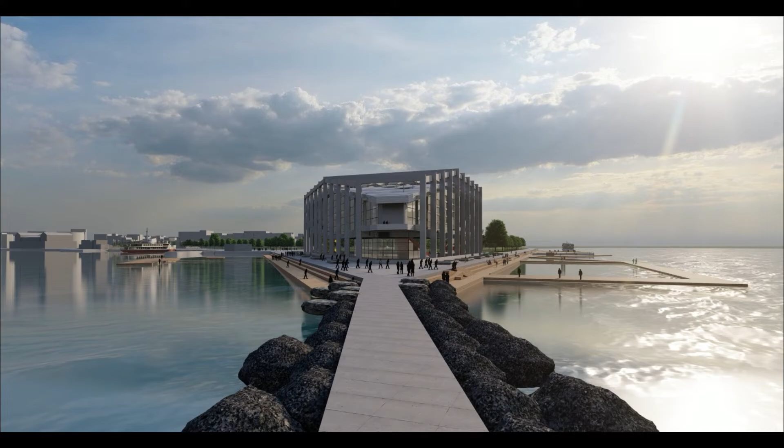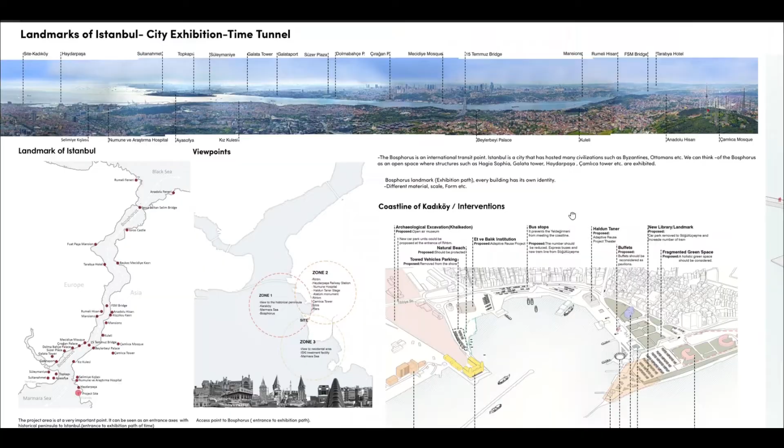Hello everyone, today I will present my 4th grade graduation project. The topic was a public library.

Let's start by explaining the location of the project. The library is located in Istanbul, Kadıköy, on the Asian side of Turkey, at the entrance point of the Bosphorus. You can see the project site here: this is the Bosphorus, this is the Black Sea, this is the Marmara Sea, and this is the historical peninsula where Sultanahmet, Hagia Sophia, and Topkapi are located. You can match this map and this perspective photo together, and follow the site and the Bosphorus together.

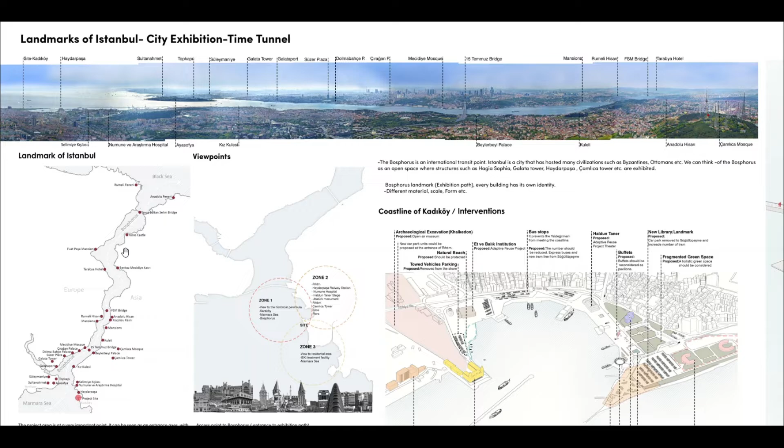The Bosphorus is an international transit point. Istanbul is a city that has hosted many civilizations such as Byzantines, Ottomans, etc. That's why we can think of the Bosphorus as an open space where structures such as Hagia Sophia, Galata Tower, Haydarpaşa, and Çamlıca Tower are exhibited.

As a first concept, Sultanahmet and Hagia Sophia are located here, at the top of the hill, so the new library will try to reach them.

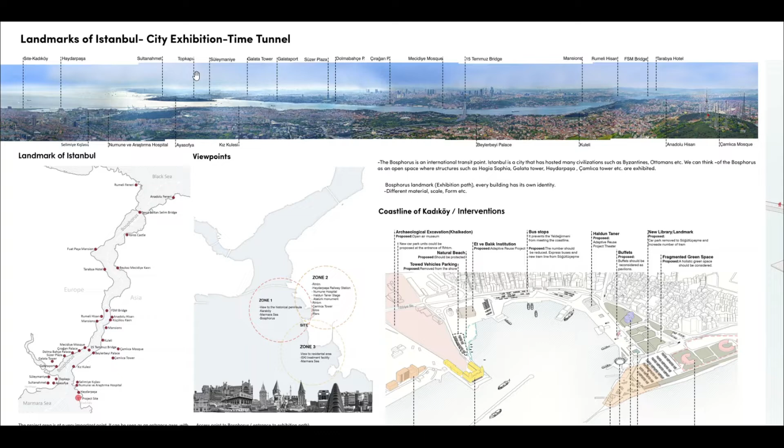Looking at a bit of analysis, we can see the viewpoints of the site. The site directly sees the historical peninsula and the Marmara Sea in that direction. I divided them into zone 1, zone 2, and zone 3, and they have different kinds of opportunities, so it's a very important point.

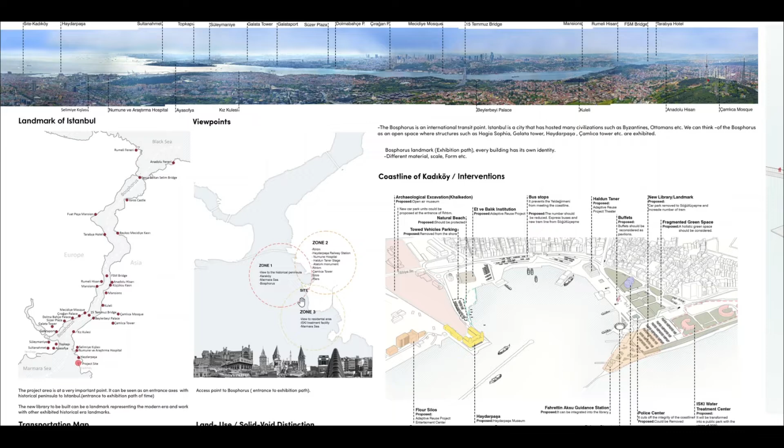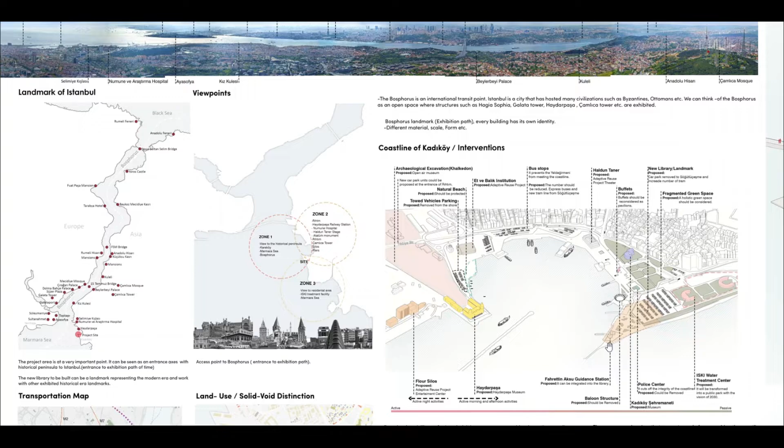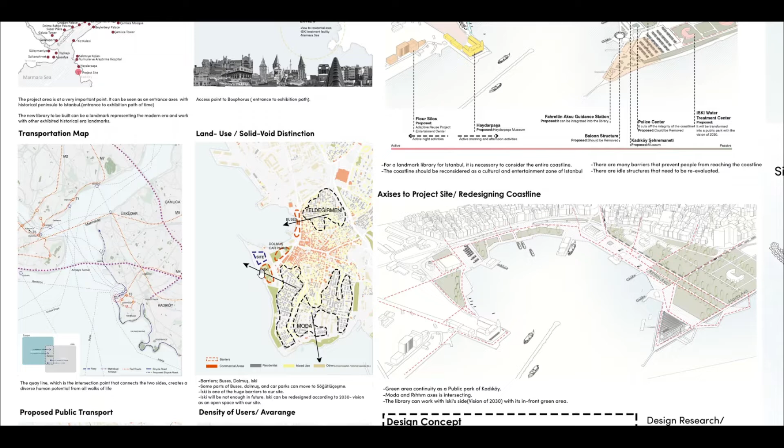Looking a bit closer, maybe you can understand this location better. This is the coast, this is the site, and this is the location of the building. Looking at the transportation map, it's very easy to reach the site from all over Istanbul. And looking quickly at land use, this is the site here, and behind the site we have commercial and residential zones.

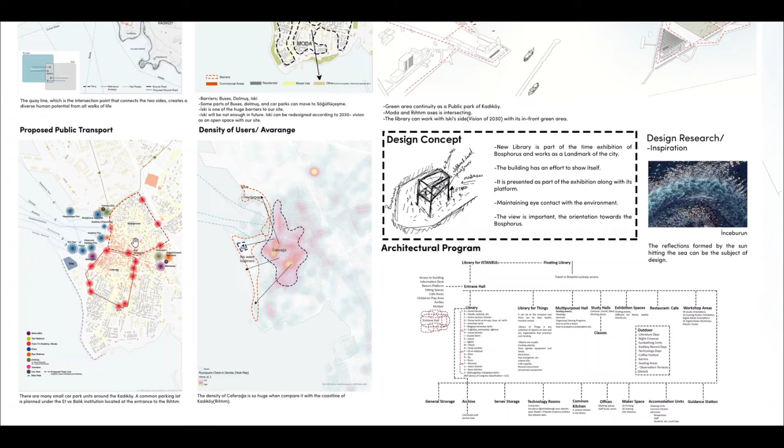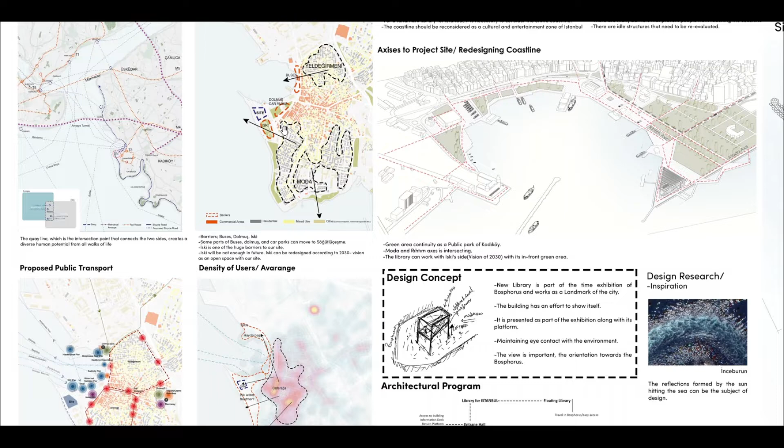You can check them in more detail in the PDF. I have some proposed public transport changes, because I remove this bus and the dolmuş car park unit, and that's why I propose a new tram road around this Yeldeğirmeni zone.

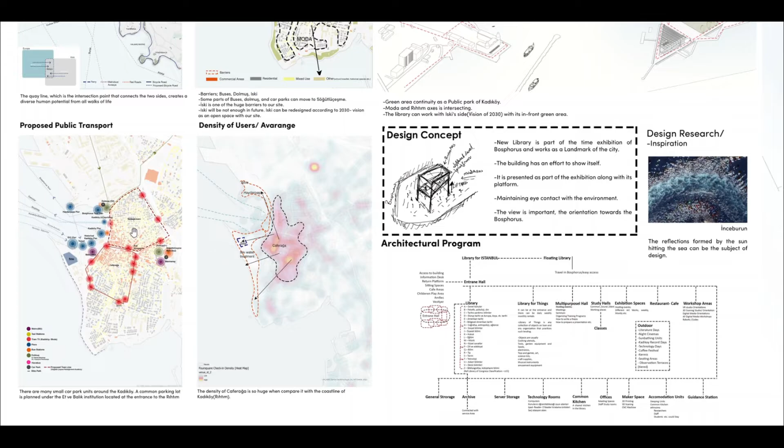This is a cove where our site is located, and this is the Kadıköy region, and this is the coastline of Kadıköy. For a landmark library for Istanbul, it's necessary to consider the entire coastline.

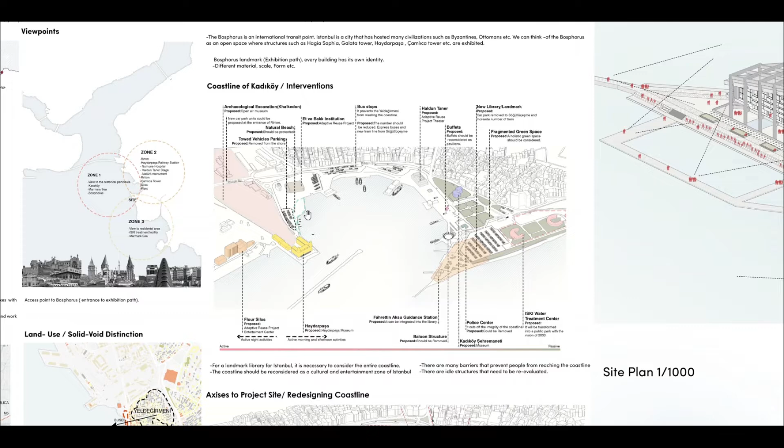The coastline should be reconsidered as a cultural and entertainment zone of Istanbul. But there are many barriers that prevent people from reaching the coastline. That's why I find a new place for the bus stops and the buffets, and I reorganize the buffets as an intervention area for the coastline. You can check it in more detail, of course.

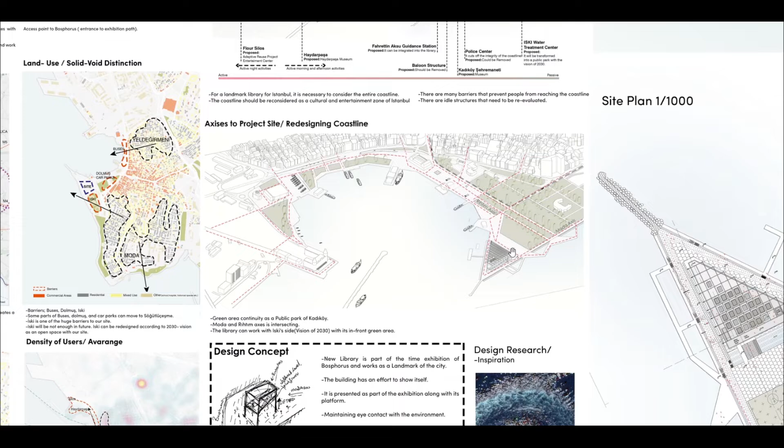This is the project site, and this is the project, the new library. You can see how we can reach the building from all the access points. To summarize the design concept, at the beginning I mentioned that the new library is part of the time exhibition of the Bosphorus and works as a landmark of the city.

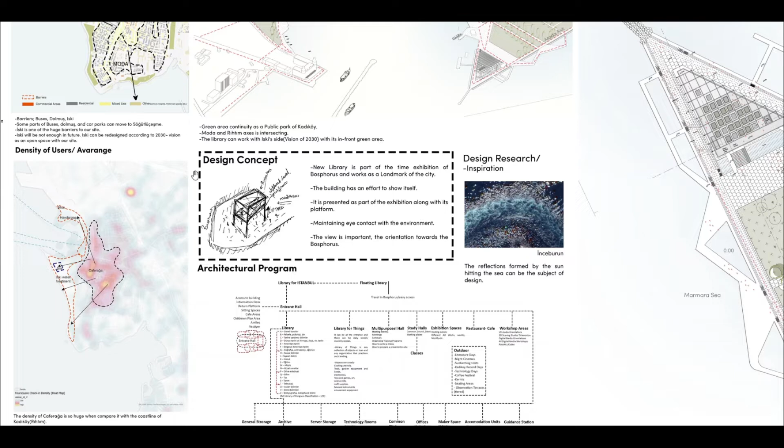As I told you, there are many buildings exhibited along the Bosphorus, and our site is at a very important point, so the new building is also going to be part of this exhibition path.

I also mentioned that the new building has an effort to show itself. The new library tries to reach Hagia Sophia and Sultanahmet, etc., presenting itself as part of the exhibition along its platform.

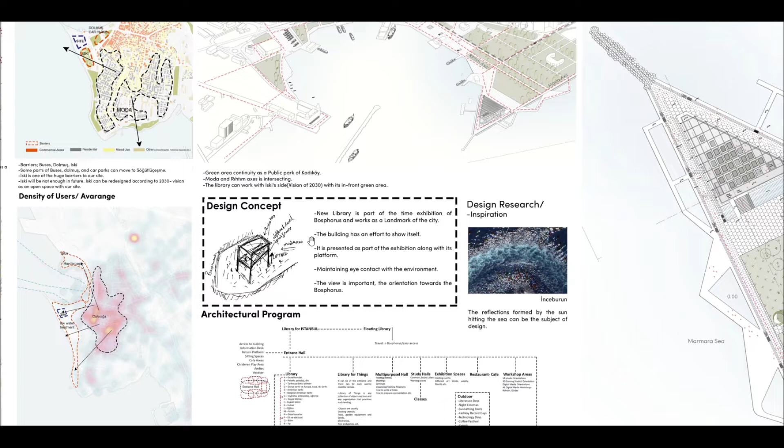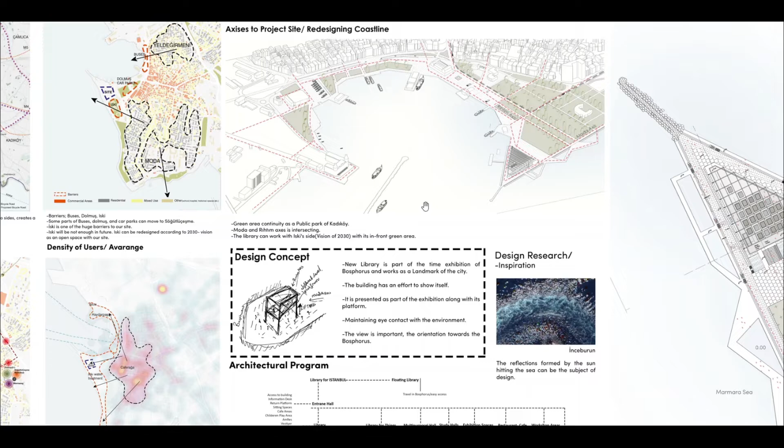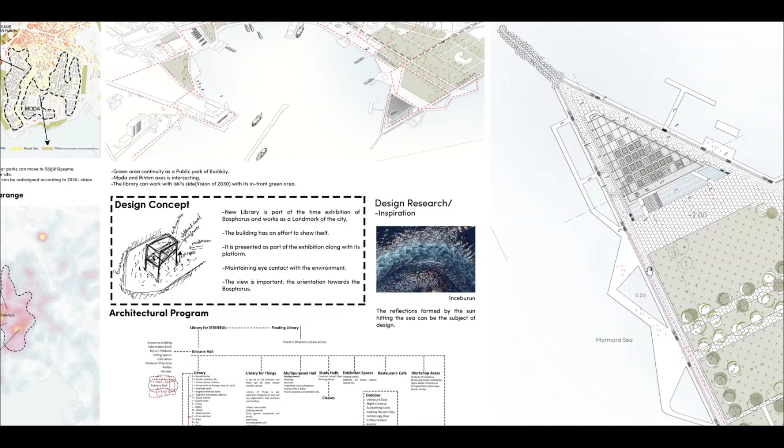As I mentioned in the viewpoint analysis, maintaining eye contact with the environment and the view is important - the orientation towards the Bosphorus. Because of this orientation, it also creates a square, a public square, in the site plan, but I will talk about that later.

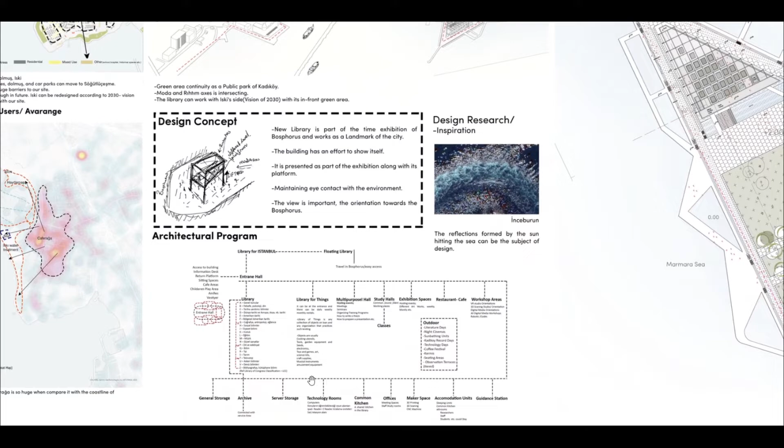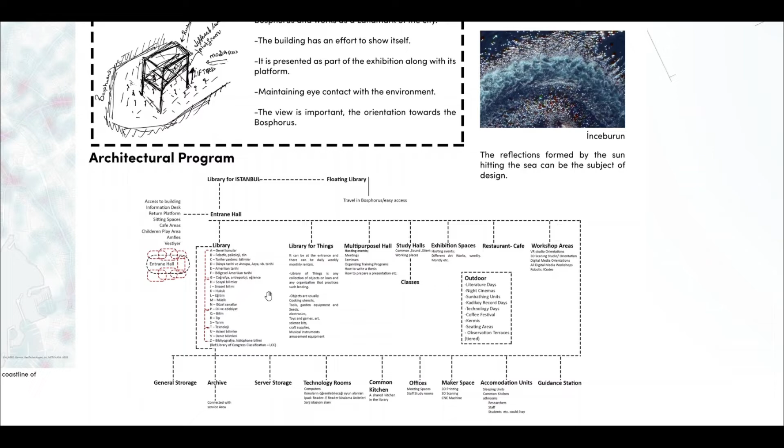As an architectural program, you can check it in more detail. This is a public library. I didn't separate the library room by room, but it has a variety of functions that you are going to see in the proposal.

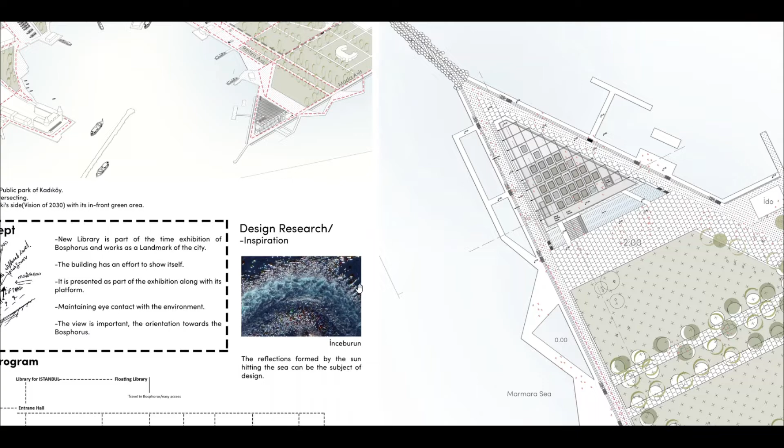I took some inspiration from the sea, actually this reflection, and I analyzed this reflection in more detail. When we see the overall building, it creates a square in front of it. The building is lifted from the ground, so it creates a new defined public square underneath it.

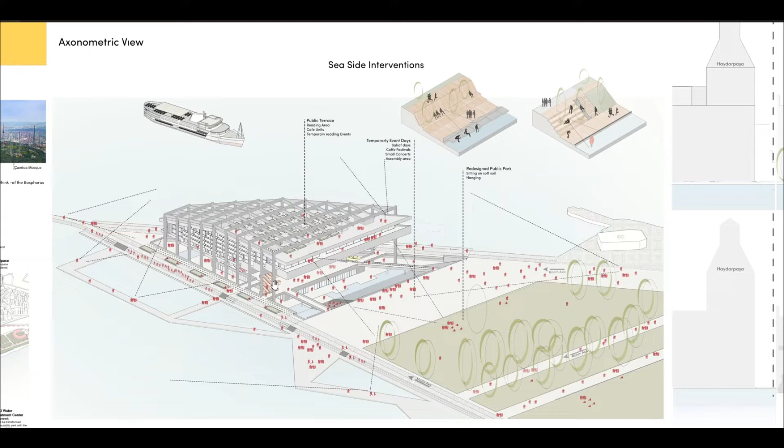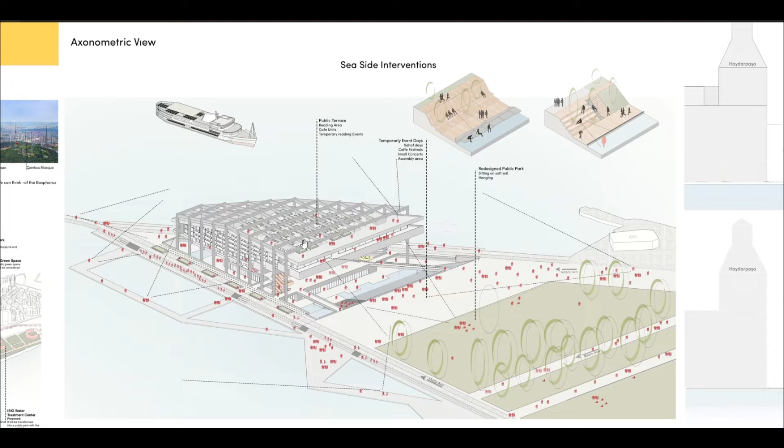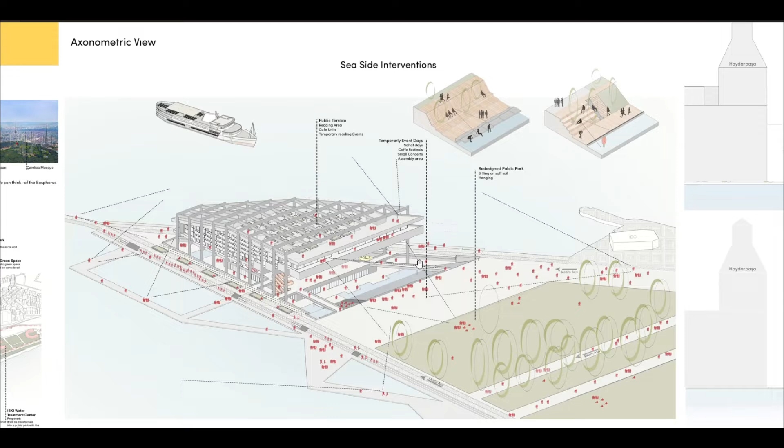And it's also, as I mentioned before, trying to show itself to the environment, to all of Istanbul, let's say. And of course, the building has an outer structure and inner structure. The outer structure, which I'll talk about in more detail, is concrete, and the inner structure is a steel structure, and the steel structure is hanged to this outer structure.

I mean the steel structure is hanged to the outer structure. So it's because underneath here there is a multipurpose hall, and it creates a new defined public square under it. So it's beneficial, or useful, let's say, to hang the building to the outer structure.

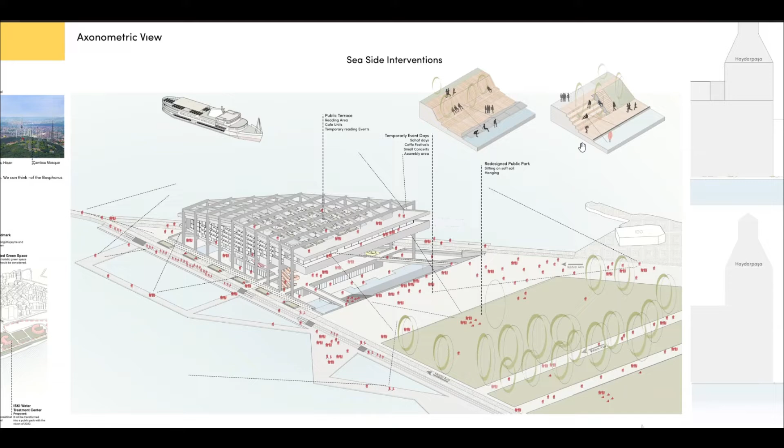Of course, you can see some seaside interventions along this Moda axis and the Rıhtım axis. This Moda axis is a very public area, and the Rıhtım axis is also a very public area for people. So I have some interventions about them, which you can check in detail.

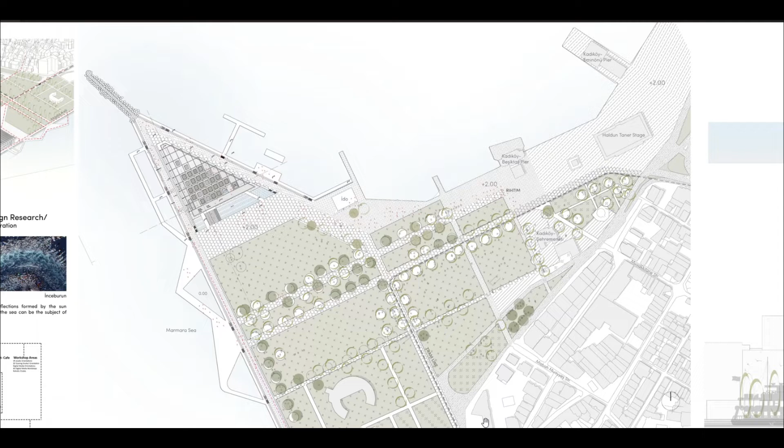When we look at the site plan, the green area has been redesigned as a concept according to the axis of these roads, and the new tram road is proposed. You can see it here, and it's coming to the coastline. I'm going to try to explain most of the things from this section, let's say.

As I mentioned in the axonometric, it creates a square. It looks to the Bosphorus side, which looks to the historical peninsula. The buildings are designed like stairs, so people can always have a connection with their surroundings. For example, if someone stays here or here, they always have an eye connection with the Bosphorus, let's say.

And of course, it's designed like a kind of stairs. I'd say this one creates, it gives me very nice things, let's say.

It's because, you know, this is a library, and I need an archive and some digital media workshop and classes, and maybe we don't want light in this room, for example. That's why I locate the archive and the digital media workshop under these stairs, let's say, and they are in a closed area.

As you can see, these are the closed areas, and people can focus on their work better, let's say. Of course, I have some children's lab and the DLF lab, and they are hanged from the other shell.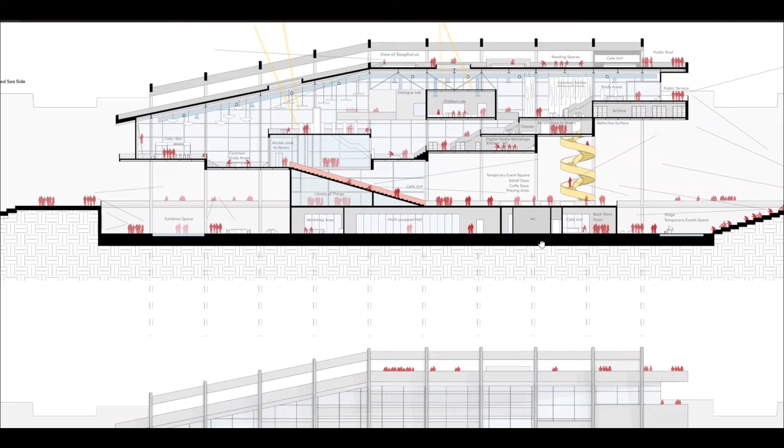And this other shelter creates not a reflection, of course, it's a shadow, let's say. So I will show all things in the renders.

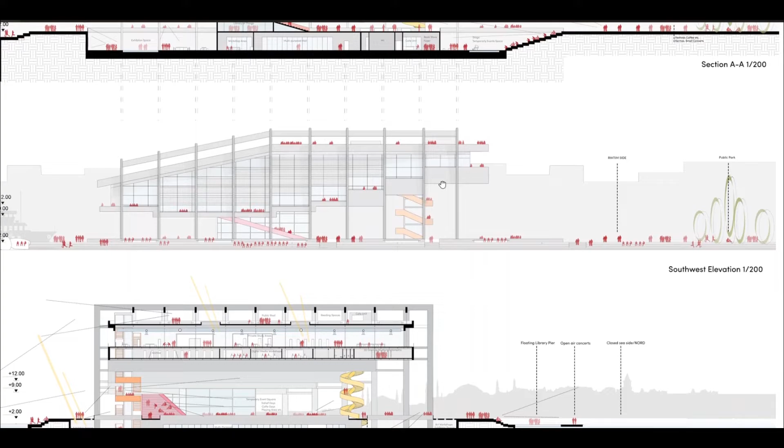So this is the elevation of this side, and this is the coastline. People can hang out at the coastline and so on. And of course, I have a public terrace, so people can also hang out and have a connection with the public park, the redesigned public park, let's say.

So this is the other section. As you can see, this section is here, and I'm looking toward the historical peninsula. As you can see, this is the Hagia Sophia and Topkapi, and so on. And all these digital media workshops, archive, and 3D scanning photometric areas are located under the stairs, let's say, here, I mean.

And of course, in the upper office, I have some study areas, and the library is located here. Main library is located there.

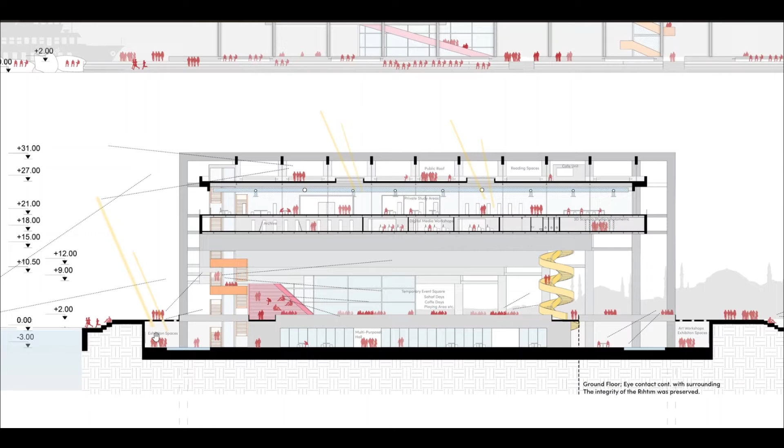As I mentioned, the -3 levels, we have an exhibition and the workshop area. Of course, we have some exhibition spaces, and it gets some natural light there, and it also creates a playful area for people, and people hang out there, right?

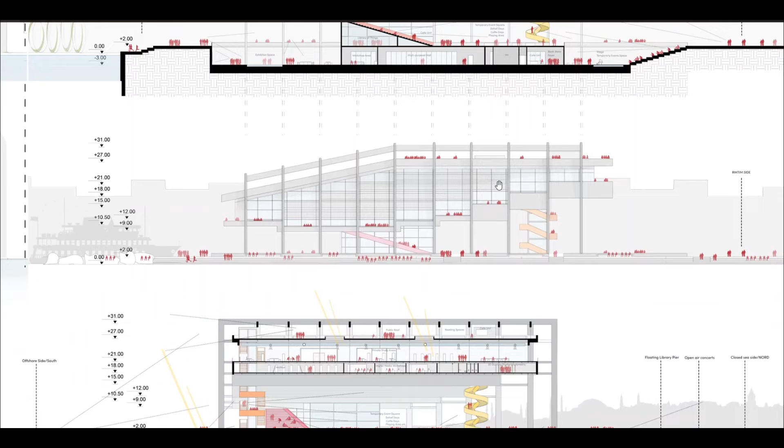And of course, the three sides of the building are surrounded by a water element, because you are gonna see again from my renders this under of the stairs, the material is reflected material. The people, for example, when they stand there, can easily see the surrounding, reflected surrounding actually. At the beginning of the analysis, I mentioned also this reflection analysis to you.

This is behind the building, actually, the other side of the building. So this is another elevation, let's say. This is for the first page. If you have any question, you can make a comment. I'm really gonna be happy to see your comments, actually.

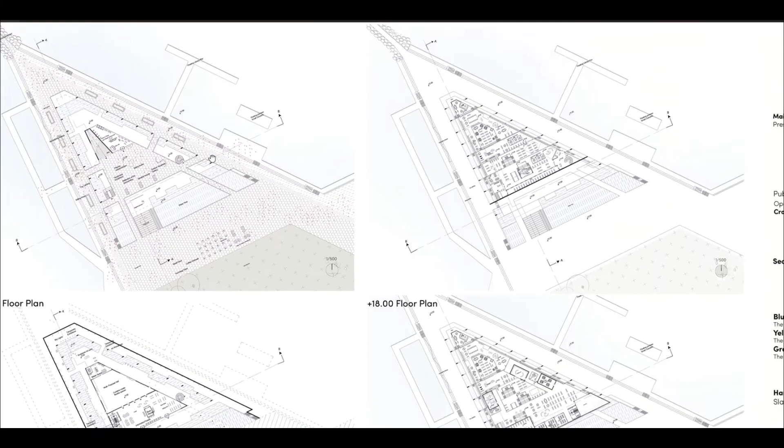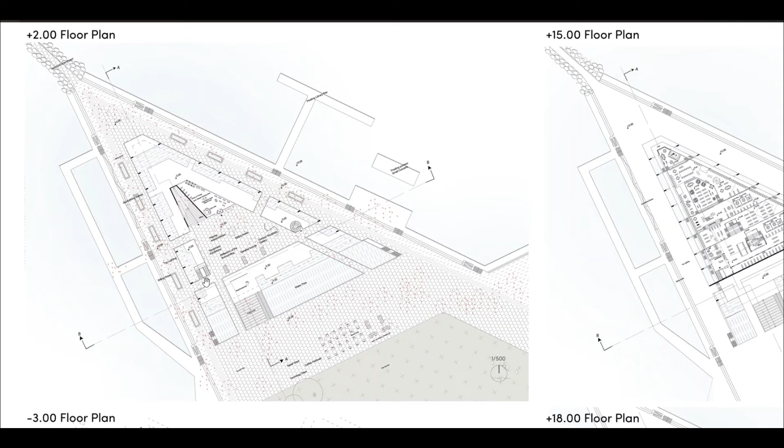So when I come to the floor plans, you can see more detail, but of course I would like to explain a little bit. It's a +2.00 floor plan, let's say, and you see this creates a public square again, and this is some temporary events going on there, and we have three kinds of monumental stairs that let people reach the main building, let's say, and these are the floor plans of the building.

When I come to this structure, the exploded axonometry, as you can see, I have a main structure, right? Concrete main structure, and I have a secondary steel structure here. You can see this one and this one. So they create one shell, and this shell is hung to the other shell.

And I have a public roof actually, and there are openable top windows for cross ventilation for a building. It's really huge volume actually, so I really need a ventilation system. You see these tubes, blue tubes, yellow tubes and green tubes, and they have different kinds of purposes. For example, blue tube is air conditioning, yellow tubes electric, and green tubes water tubes, etc.

And this side of the building, in the southwest facade, I have also some sun-protected mesh system, because the building has openable double glazing windows. That's why I need some protective elements a little bit in the southwest direction, and it creates a buffer zone, let's say.

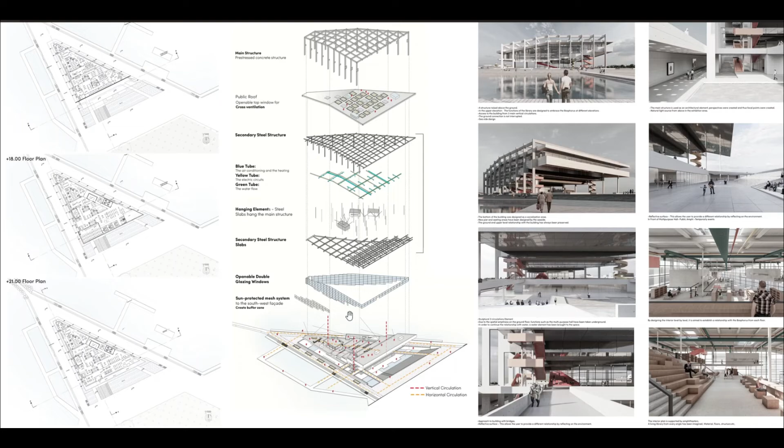So when I come to some atmospheric views, actually, you can of course look at it more in detail, but as a concept, you see the inner structure clearly, and outer structure, and it rises above the ground.

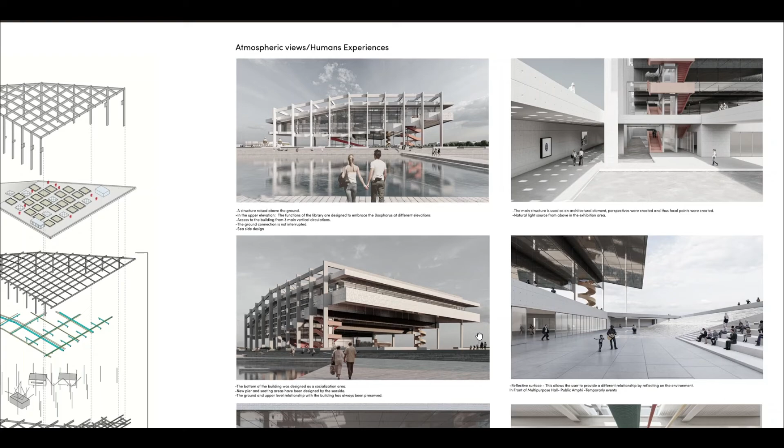So you can see at the minus floor level, you can see this exhibition area, and some natural light is coming there, and it creates a playful area, let's say. And this shows you how this structure is very huge actually.

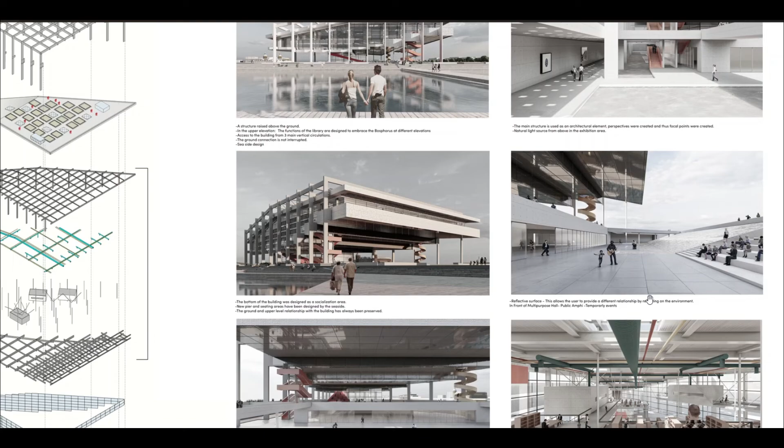As I mentioned, the bottom of the building was designed as a socialization area. So you see this kind of amphitheater where people have temporary events going on there, let's say, and we have three kinds of circulation elements to reach the building, and this you see is the reflective surface actually.

So the people and environment reflection, and the interior environment, you can see these tubes, the ventilation tubes and so on.

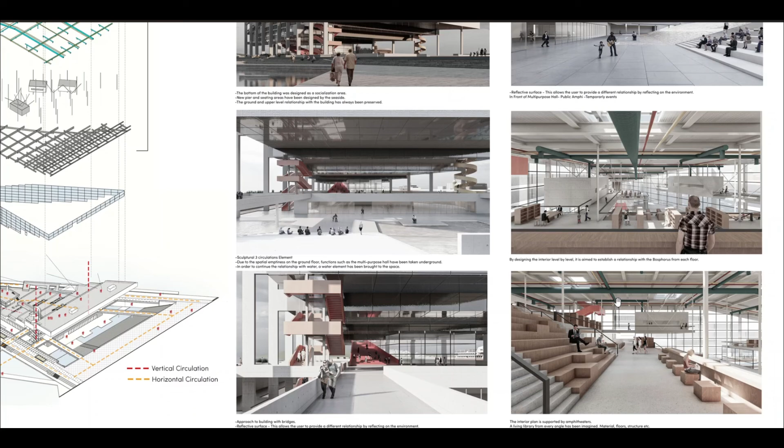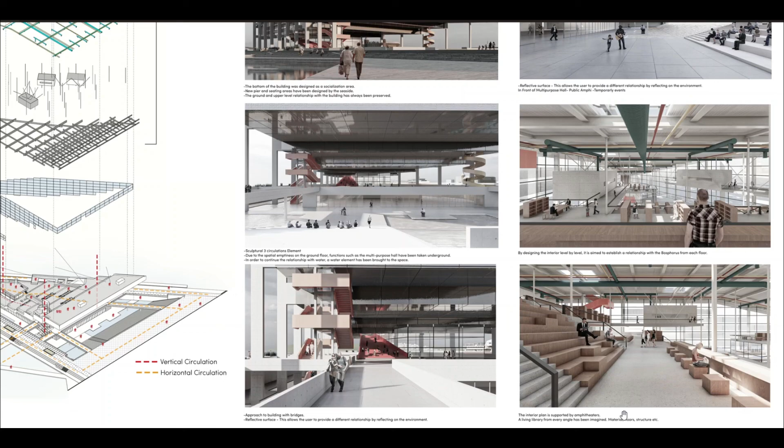And I forgot to mention that in the section, but I would like to mention it here. I have some acoustical elements, because it's a huge volume, so we have some acoustical elements like curtains that create acoustical elements for here, and of course these are designed as stairs, so I have many of this kind of amphitheaters, so people can read and hang out with people, study there, and so on actually.